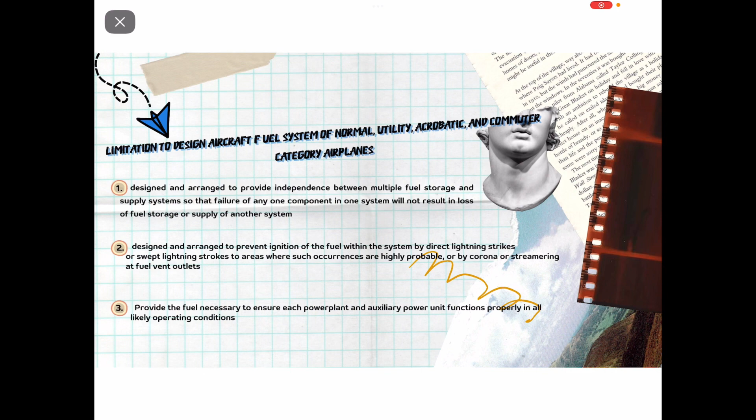Fourth, provide the flight crew with the means to determine the total usable fuel available and provide uninterrupted supply of that fuel when the system is correctly operated, accounting for likely fuel fluctuation. Fifth, provide a means to safely remove or isolate the fuel stored in the system from the airplane.

Sixth, design to retain fuel under all likely operating conditions and minimize hazard to the occupants during any survivable emergency landing. Seventh, prevent hazardous contamination of the fuel supplied to each power plant and auxiliary power unit.

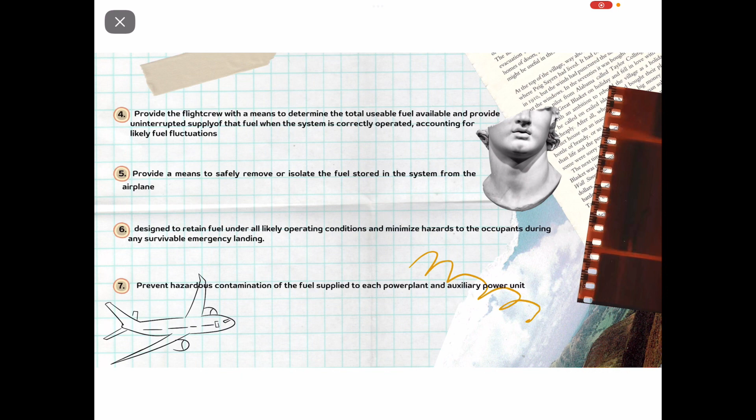Okay, next. This is part 1. Limitations to design aircraft fuel storage systems of normal, utility, acrobatic, and commuter category airplanes. First, withstand the loads under likely operating conditions without failure. Second, be isolated from personnel compartments and protected from hazards due to unintended temperature influences. Third, be designed to prevent significant loss of stored fuel from any vent system due to fuel

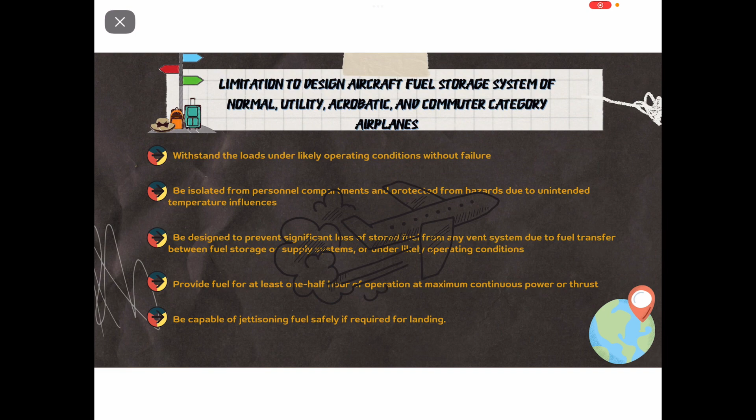transfer between fuel storage or supply systems, or under likely operating conditions. Fourth, provide fuel for at least 1/2 hour of operation at maximum continuous power or thrust. Fifth, be capable of jettisoning fuel safely if required for landing.

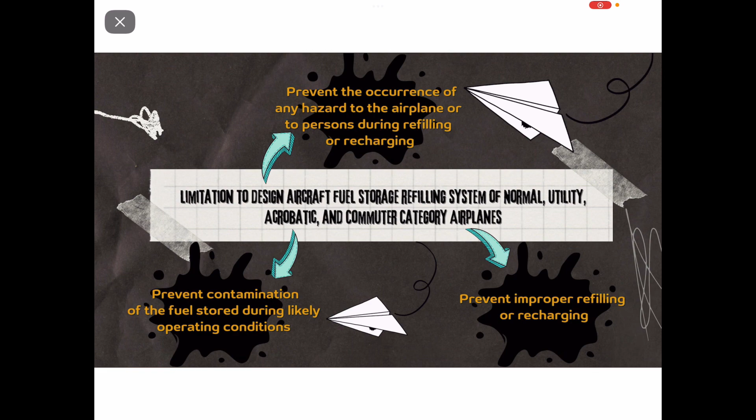Okay, this is part 2. Limitations to design aircraft fuel storage refilling systems of normal, utility, acrobatic, and commuter category airplanes. First, prevent the occurrence of any hazard to the airplane or to persons during refilling or recharging. Second, prevent contamination of the fuel stored during likely operating conditions. Third, prevent improper refilling or recharging.

Types of aircraft fuel tanks. Rigid removable fuel tanks. Many aircraft, especially older ones, utilize an obvious choice of fuel tank construction. A rigid tank is made from various materials, and it is strapped into the airframe structure. The tanks are often riveted or welded together and can include baffles, as well as other fuel tank features.

They're typically made from 3003 or 5052 aluminum alloy or stainless steel and are riveted and seam welded to prevent leaks. Many early tanks were made from thin sheet steel coated with a lead or tin alloy called terneplate. The terneplate tanks have folded and soldered seams. Figure 1 shows parts of typical removable fuel tanks.

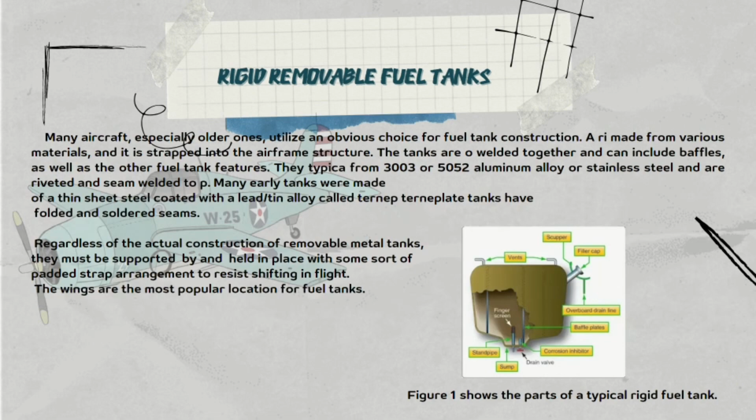Regardless of the actual construction of removable metal tanks, they must be supported by the airframe and held in place by some sort of padded strap arrangement to resist shifting in flight. The wings are the most popular location for fuel tanks. Figure 2 shows fuel tank bays in a wing root with tank straps.

Some tanks are formed to be part of the leading edge of the wing. These are assembled using electric resistance welding and are sealed with a compound that is poured into the tanks and allowed to cure. Many fuselage tanks also exist. Figure 3. In all cases, structural integrity of the airframe does not rely on the tanks being installed, so the tanks are not considered integral.

Being able to remove and repair or replace a fuel tank can be a great convenience if a leak or malfunction with the tank exists. Repairs to the fuel tanks must be done in accordance with manufacturer specifications. It is especially critical to follow all safety procedures when welding repairs are performed. Fuel vapors must be removed from the tanks to prevent explosion.

This typically involves washing out the tank with water and detergents, as well as some number of minutes that steam or water should be run through the tanks. Time varies by manufacturers. Once repaired, fuel tanks need to be pressure checked, usually while installed in the airframe to prevent distortion while under pressure.

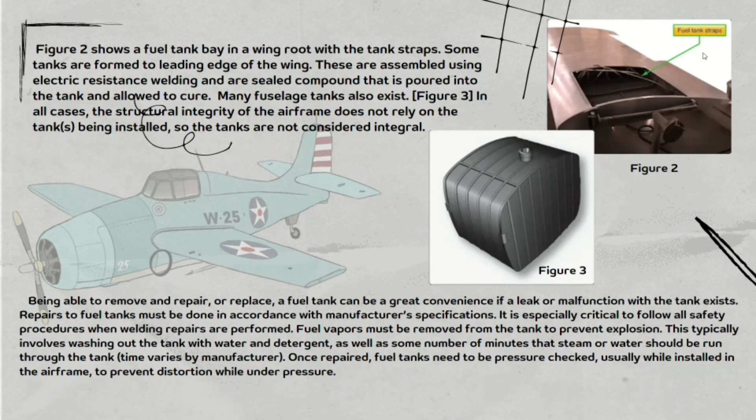Bladder fuel tanks. A fuel tank made out of reinforced flexible material called a bladder tank can be used instead of a rigid tank. A bladder tank contains most of the features and components of a rigid tank, but does not require as large an opening in the aircraft skin to install. The tank, or fuel cell as it is sometimes called, can be rolled up and put into a specially prepared structure bay or cavity through a small opening, such as an inspection opening. Once inside, it can be unfolded into the full size.

Bladder tanks must be attached to the structure with clips or other fastening devices. They should lie smooth and unwrinkled in the bay. It is especially important that no wrinkle exists on the bottom surface, so that fuel contaminants are not blocked from settling into the tank sump.

Bladder fuel tanks are used on aircraft of all sizes. They are strong and have long life with seams only at installed features, such as the tank vents, sump drain, fuel spout, etc. When a bladder tank develops a leak, a technician can patch it following manufacturer's instructions. The cell can also be removed and sent to a fuel tank repair station familiar and equipped to perform such repairs.

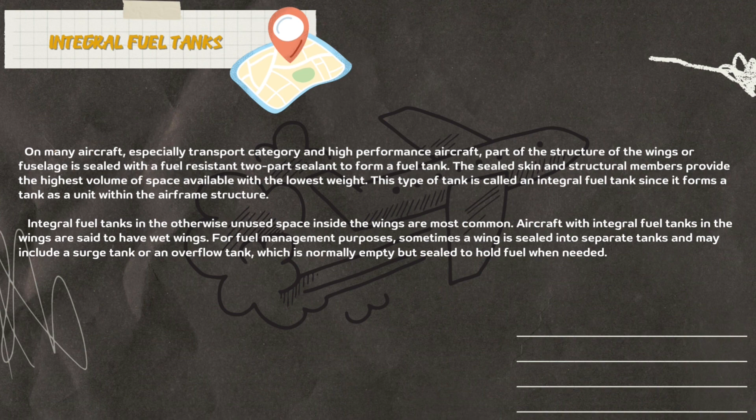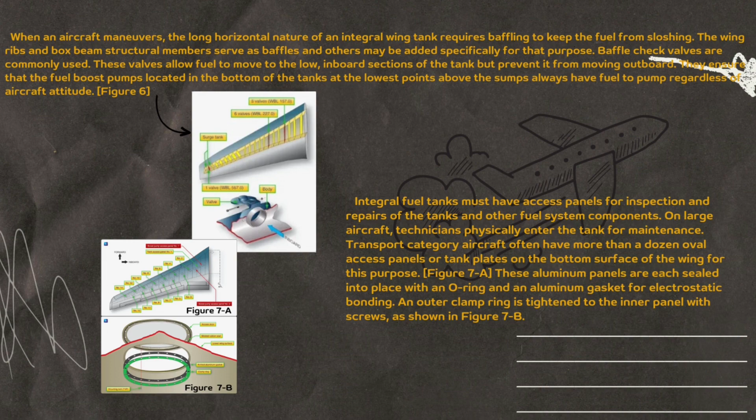When entering and performing maintenance on an integral fuel tank, all fuel must be emptied from the tank, and strict safety procedures must be followed. Fuel vapors must be purged from the tank, and respiratory equipment must be used by the technician. A safety attendant must be positioned just outside of the tank to assist if needed.

Aircraft using integral fuel tanks normally have sophisticated fuel systems. This includes in-tank boost pumps. There are usually at least 2 pumps in a tank that deliver fuel to the engines under positive pressure. On various aircraft, the in-tank boost pumps are also used to transfer fuel to other tanks, jettison fuel, and defuel the aircraft.